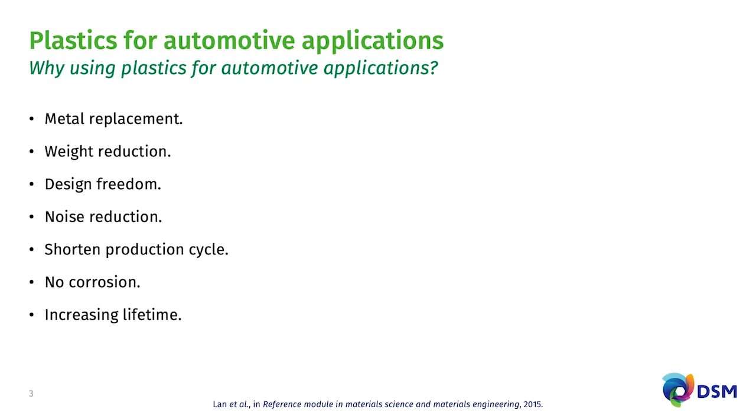Why do we use plastic for automotive applications? There are at least several reasons to do so. The most important one is to use plastic as a metal replacement. This is related to the weight reduction of the car and also lowering greenhouse gas emissions, which are currently, and in the future, being regulated more and more.

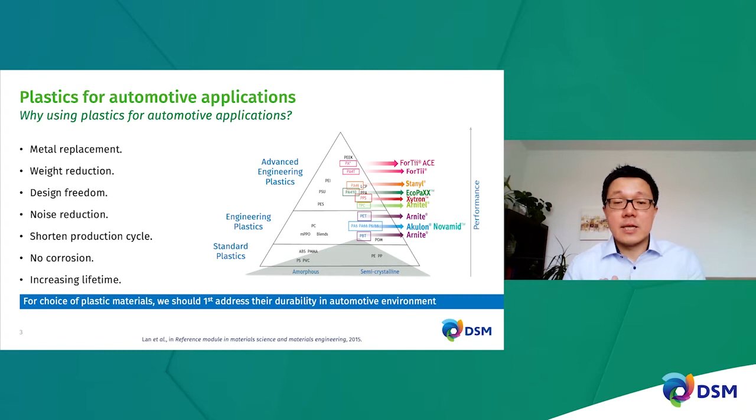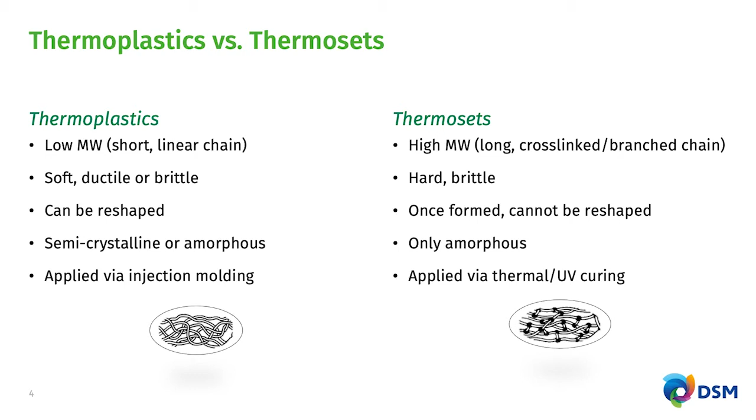In essence, plastic can be found in two forms, either as thermoplastics or thermosets. Thermoplastic polymers typically have a lower molar mass. They're soft or can be found as ductile or brittle materials. This is the type of plastic that is usually applied via injection molding, and you can find it most of the time in under-the-hood applications for automotive.

The second type is thermosets. This is a type of plastic or polymer that has a high molecular weight. It is hard and brittle, usually applied via thermal or UV curing. And this is the type of plastic that you find as paint or coating for automotive in general.

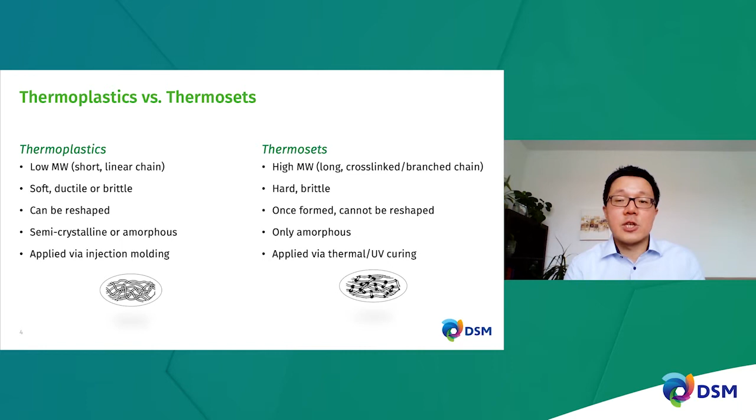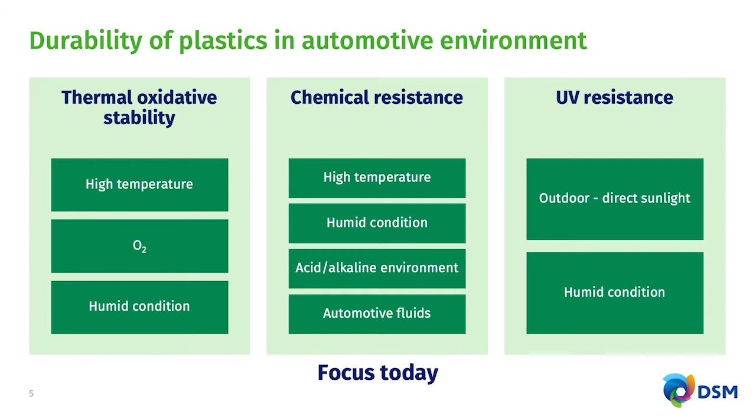If we are talking about durability of plastics in the automotive environment, there are three things that pop up to mind. The first one is related to thermal oxidative stability. The second one is related to chemical resistance. And the third one is related to UV resistance, which is important for plastics used for outdoor applications. Today we focus on the chemical resistance.

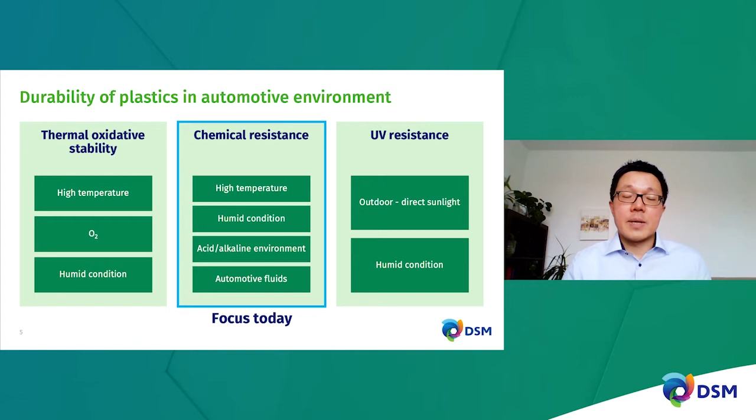Speaking about chemical resistance, usually we are faced with the behavior or resistance of plastics under high temperature, high humidity conditions, high acid or alkaline environments, as well as the presence of additives that are typically used in automotive fluids.

As a definition of chemical resistance of plastics, I borrow the one used by Alfredo Campo in 2008. Here, it is said that chemical resistance is the ability of a polymer material to maintain its original properties after being exposed directly to a chemical environment for a specific period of time.

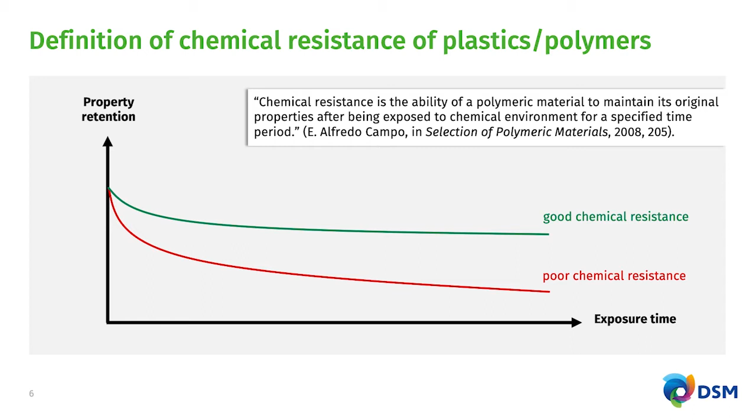Just to give you an illustration of this definition, I made a plot where the y-axis is property retention of plastics versus exposure time. Plastics that have poor chemical resistance are shown in the red curve. Usually, as a function of aging time, the property retention of these plastics decreases dramatically compared to plastics that have good chemical resistance, which is indicated in the green curve.

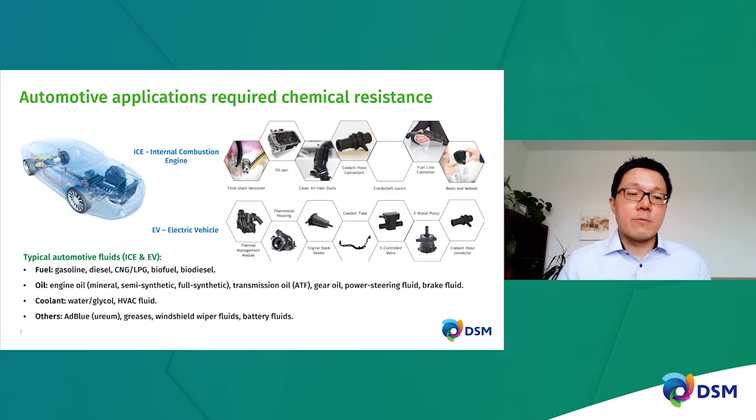And for other types of applications, for example, plastic that is in direct contact with fuel, with oil, and with other types of chemicals such as AdBlue, we can also think about what type of performance criteria such plastics need depending on the chemical environment that they have.

Now, why is it important to have a good understanding of chemical resistance in general? There are at least 3 reasons. The first one is related to the ability for us to choose proper materials for specific applications. The second reason is to be able to better predict performance of plastics under certain operating conditions. This is really intended to narrow down the number of tests. If you know more or less the performance of plastics, then you will be able to design better testing, meaning that the number of tests can be lowered.

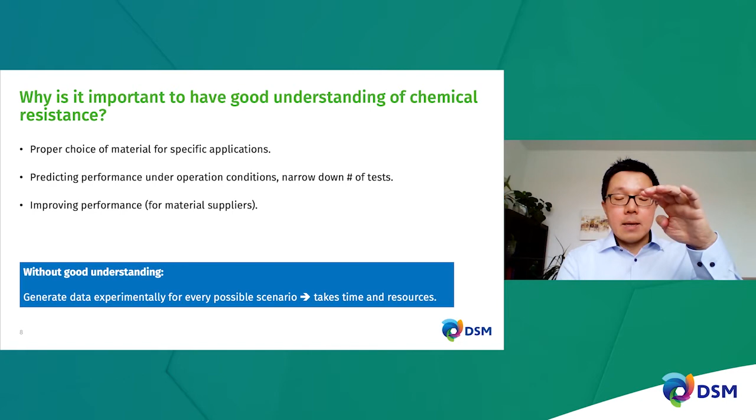For us at DSM as a material supplier, we want to have a better understanding of chemical resistance of plastic in order to improve the performance of the plastic itself for certain applications. Without good understanding, the most straightforward way is typically we generate data with all possible scenarios. Meaning that you typically have a matrix of different types of materials, different types of chemicals used to age the plastics, and a matrix related to different temperatures and different aging times.

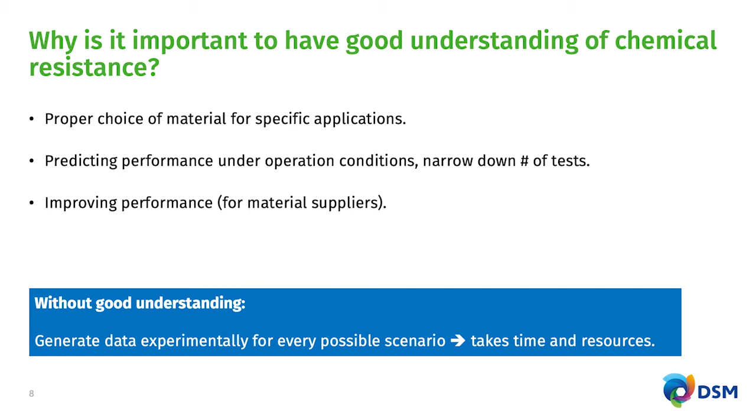So without any understanding, we can do all types of experiments, but typically this takes a lot of time and a lot of resources. So having good understanding is also useful to narrow those down, to have a better selection of the number of tests that we are looking at.

The focus of today's presentation is not on the detail of chemical resistance of a specific polymer for specific applications, because if we go that route, we will only narrow down to certain specific chemicals that might not be relevant to other audiences. So here I consciously chose a more generic theme: the typical challenges in conducting chemical resistance studies, the basic principles of degradation mechanisms during chemical aging, and the important parameters which play a role in chemical resistance.

So hopefully by choosing this more generic feature on chemical resistance or plastic durability study, it can trigger some discussion that we will have in the future. If you have questions about specific chemicals for specific applications, just email me, and then we can discuss this offline.

What are the challenges in chemical resistance study in general? Before we go to that, let me present a little bit on the typical chemical aging and testing that we do at our lab. If we are doing chemical aging, usually we use a standard representative form of plastics in the form of the tensile bar. We place this tensile bar in the sample tray, the sample tray is placed in the glass jar, the glass jar is filled with automotive fluids, and then we put the glass jar into the oil bath, increase the temperature, and start aging.

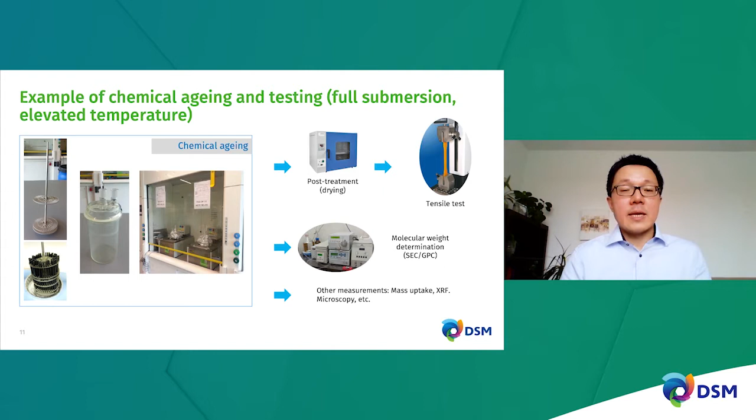After a certain period of aging, we usually take the tensile bar out. We do post-treatment from time to time, depending on the situation, and we do tensile tests afterwards. Additional analysis such as molecular weight analysis is performed depending on the situation. In this case, we use molecular weight analysis using size exclusion chromatography, SEC, also known as gel permeation chromatography, GPC, and other analytical measurements such as mass uptake, X-ray fluorescence, and microscopy.

So in the next few slides, I will give you a little bit more example on some nuance in the aging condition that may play a role in the eventual result of your aging test. So the first example that I want to highlight is the importance of ambient environment. When you do aging in nitrogen versus air, sometimes the result can be so dramatically different, as is shown here. This figure on the left shows the tensile strength retention of polyamide aged in ATF at 150 degrees Celsius under nitrogen environment or air environment.

As you can see, in nitrogen environment, there is no tensile strength retention reduction whatsoever, whereas when you change the nitrogen environment to air, within 200 hours you already reach half lifetime of the materials. The same story for polyamide in Dexron 6 ATF at 150 degrees Celsius in the right-hand side figure. In this case, the molecular weight retention is plotted as a function of aging time. In nitrogen, you don't see any decrease in molar mass, whereas in air environment, you see that dramatic decrease, especially in the first few 100 hours. So this is really highlighting the importance of ambient atmosphere during aging.

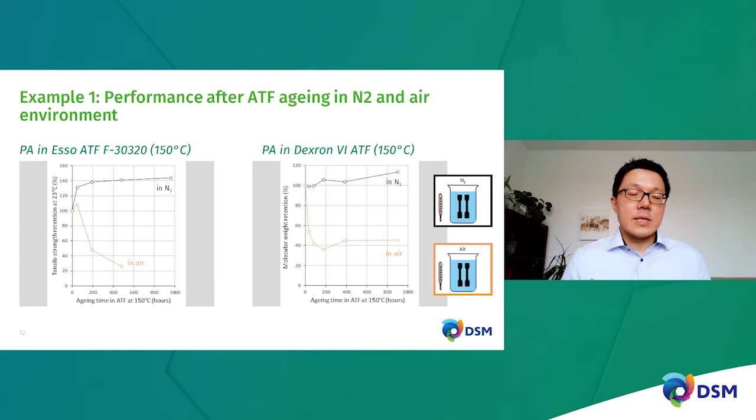The second example is something that is not that trivial. This is related to the relative amount of polymer that you use during aging. The left-hand side figure shows the tensile strength retention as a function of aging time of polymer in ATF at 150 degrees Celsius. In this case, I show two different cases where the black indicates 20% of polyamide, meaning that when you start this aging, you start with 20% polyamide and 80% ATF, versus the situation where you only use 10% of polyamide in the jar. And you can see that when you use a lot of polyamide during aging, the tensile strength retention is reduced less dramatically than when you use less polyamide, in this case 10%.

The same situation happens also, for example, if you are looking at aging of thermoplastic elastomer, TPE, as a function of aging time in ATF. Here we plot the strain at break retention at room temperature. Again, the same story. If you compare the result between 10% TPE in oil versus 15% TPE in oil, the retention of 15% TPE is shifted slightly to the right-hand side in terms of aging time. So the TPE has longer lifetime.

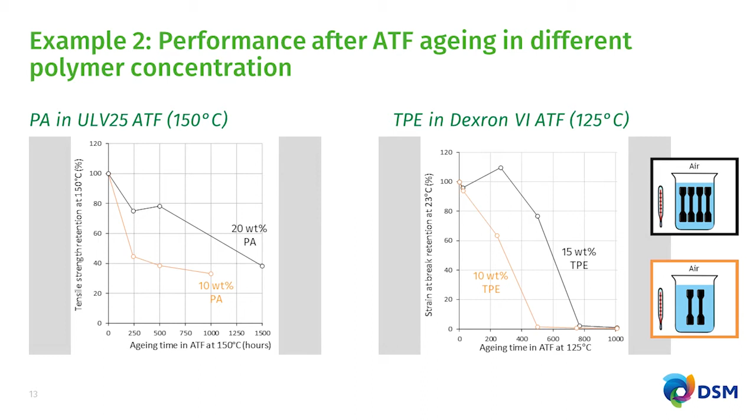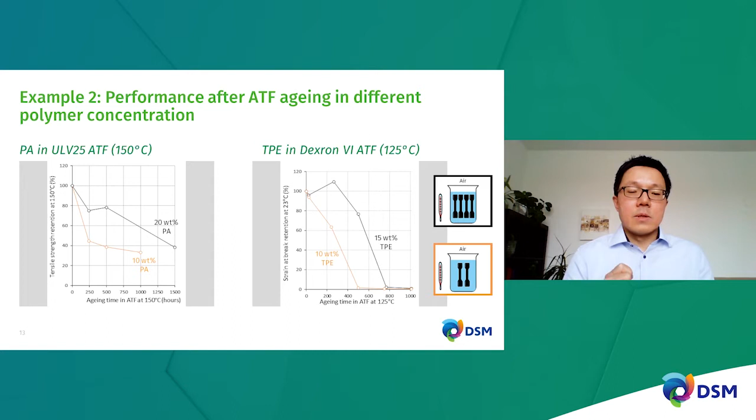Now, one way to understand this is relatively simple. You can imagine that when you start to age polymer in environments like ATF, as a function of time, more and more active species are generated in ATF that start to attack the polymer. If you have more polymer in the jar, statistically speaking, fewer active species will be absorbed into the polymer on average per sample. So the polymer starts to be degraded much later when you have much more polymer in the aging jar compared to when you don't have a lot of polymer. So the second example highlights the level of nuance and level of detail that you need to take care of when performing this type of aging.

Now, I have mentioned 2 examples, but there are a lot of different factors that can play a role in the eventual performance of materials in a chemical resistance study. So I give 3 categories here. The first belongs to the material composition dimension. As you can imagine, different polymers will have different resistance. Sample shape and sample size also play roles. Thinner tensile bars, for example, will be degraded much faster than thicker tensile bars. So design criteria for thickness are also very important, because we need to make sure that we age more representative samples during this type of study.

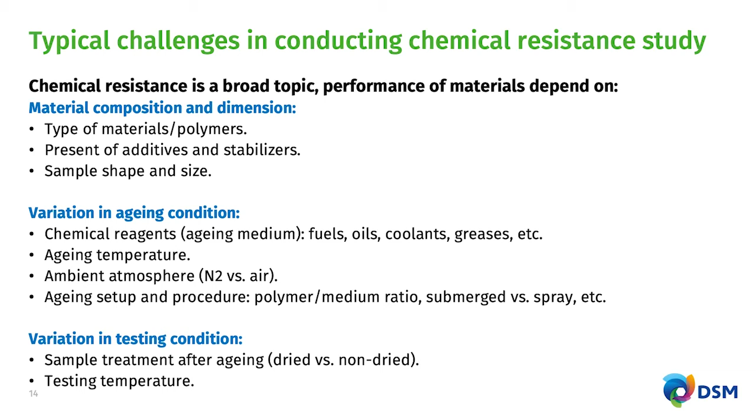The second category belongs to the aging conditions. I already talked about nitrogen versus air. But there are also differences in aging temperature, so that's something you need to be aware of. I already talked about polymer to medium ratio before, an effect that is not trivial but important. And the most important thing is also the different type of chemical agents. If you are using different types of oil, some oils are more aggressive than others.

The third is related to the testing conditions. So beware: if you test samples after aging, the performance of a dried sample versus a non-dried sample can be quite different. And also beware of comparing results from different testing temperatures. So in essence, fair comparisons between chemical resistance data from 2 different sources: if you have data from 2 different sources and try to compare them, be very careful, because if you do not know exactly the aging conditions used to generate such data, typically this data cannot be compared directly. So I always advise anybody who does this to be very careful, and make sure that you have almost identical procedures so you can actually compare 2 results directly.

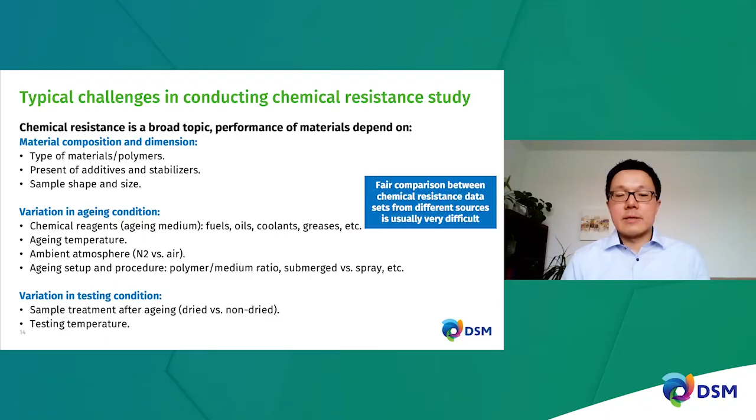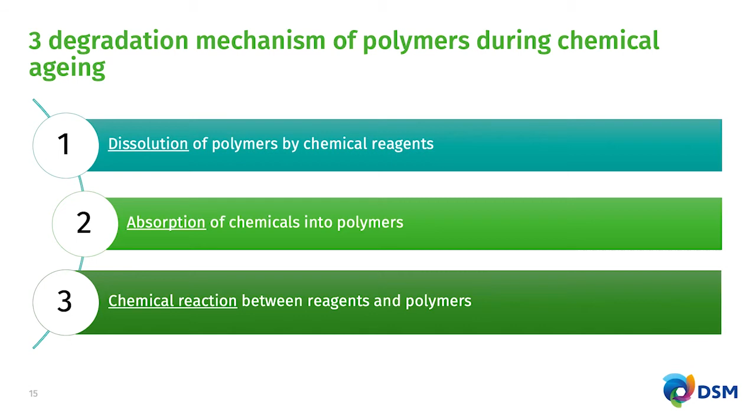Now we have been discussing degradations, but I want to highlight in the next few slides different degradation mechanisms of polymer during chemical aging. So if we're talking about degradation mechanisms, there are three things that can happen. The first is related to the fact that the chemical reagents used to age the polymer will start to dissolve the polymer. The second one is related to absorption of the chemicals into the polymer. And the third one is related to chemical reaction. So the polymers start to react with the reagents, and usually it leads to the degradation of the polymer itself and reduction in the properties.

So for the first degradation mechanism, dissolution of polymers, perhaps I can illustrate it with an object related to our daily life. If you use a laundry or dishwasher detergent pod that is made of polyvinyl alcohol, this polymer will be dissolved in water by design after several seconds. So this is the type of degradation I'm talking about, dissolution of polymers in the solvent.

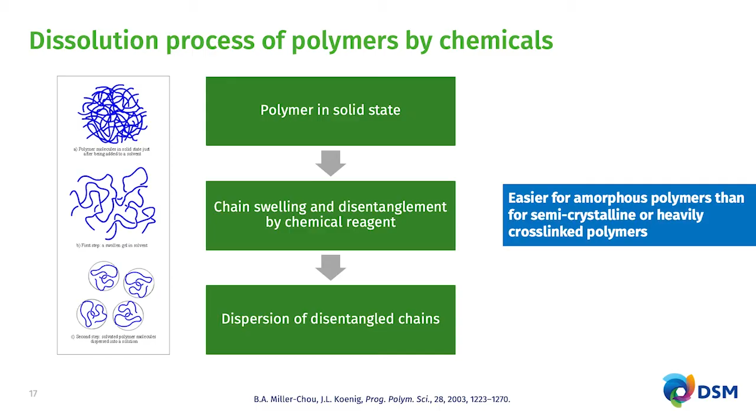So there are certain processes for dissolution, just for your information, and I'm pretty sure most of you know about this. When you start placing a plastic or polymer in certain chemical reagents, the polymer starts in the solid state, and reagents or chemicals start to be absorbed. And if this reagent is really good at dissolving the polymer, the molecules within the solid polymer start to swell because there is some absorption of chemical in there. And after that, you have disentanglement. And if this happens more and more, what you eventually have is the dispersion of the disentangled chains, meaning that your polymer is no longer in the solid state, but is dissolved by the reagents.

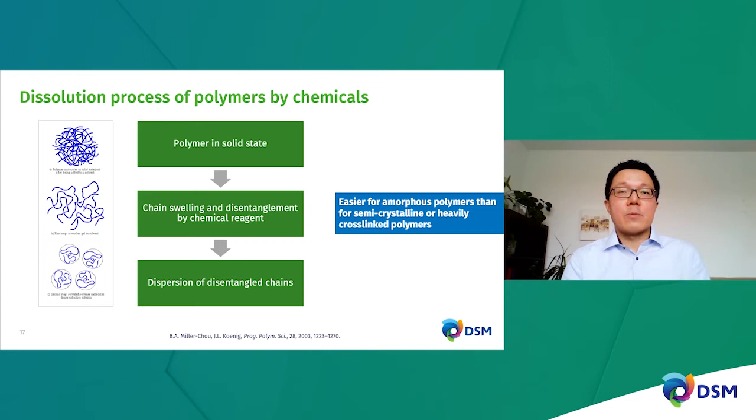This process happens more easily for amorphous polymers than semicrystalline or heavily cross-linked polymers that we typically find in thermosets. In principle, there are several ways to predict whether a certain solvent or chemical can dissolve a certain polymer. One of the most popular is to calculate the so-called solubility parameter, which by definition represents the cohesive energy density of a material. This cohesive energy density is usually expressed in terms of van der Waals forces, so dispersion force, dipole-dipole force, as well as hydrogen bonds.

To make it a bit more tangible, when you calculate the delta parameters of polymer versus solvent, if the delta parameters of these two are alike or very similar, then it is most likely that the solvent will be able to dissolve the polymer. If the solubility parameters of the polymer and solvent are not the same, then they are likely not to be dissolved.

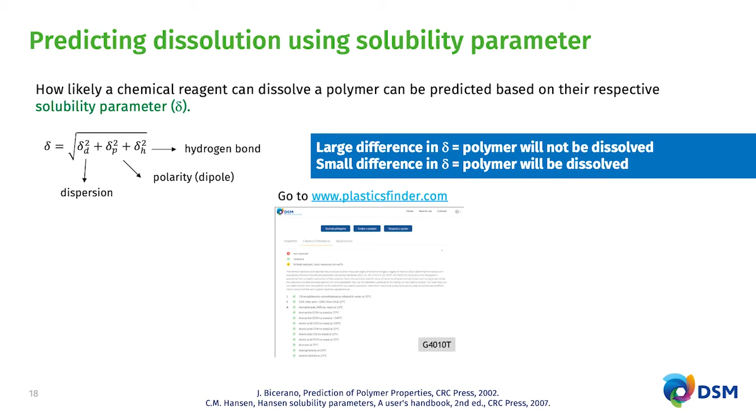So PPS in this case is really chemical resistant. Usually when you see that list, most of the time there are not so many solvents that can be used for dissolving PPS, and the solvents that cannot dissolve the polymer are usually indicated with a green check on our plasticsfinder.com website.

So the second degradation mechanism is related to the physical absorption of chemicals. Just to illustrate this point again with something you can find at home: those of you who use soft contact lenses must be very familiar with this. A silicone hydrogel contact lens is made of polymeric materials. If you compare their form and feel when they are wet versus dry, you can see the difference. Wet soft contact lenses are usually rather round and rather soft, but as soon as you dry the contact lens out, it will become brittle and wrinkled.

So this is a kind of physical phenomenon, differences due to absorption of water, in this case of a soft lens, that can play roles in the appearance and also the properties of the materials. So if we talk about absorption of chemicals, we are talking about three different parameters that play roles in this.

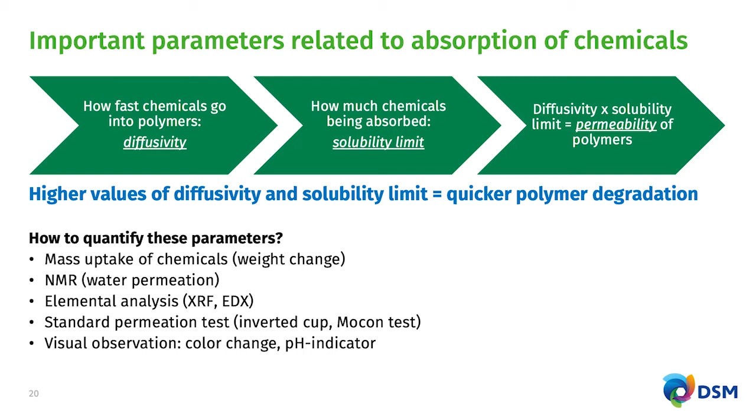So permeability is a very important parameter because this is something that can be easily measured using standard permeation tests. The diffusion and solubility can also be easily measured, for example, using mass uptake or weight change type of measurements. We can also use nuclear magnetic resonance, NMR, to study water permeation, and other types of techniques listed here.

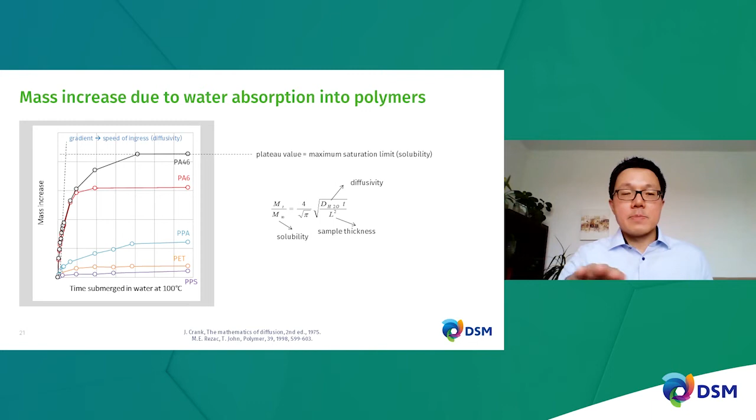So if you look into the curve belonging to PA 4,6, for example, the mass increase starts to go up, and at a certain point it reaches a plateau value, and this plateau value is really indicating the maximum saturation limit and maximum solubility limit of water that can be absorbed into PA 4,6.

The diffusion coefficient value you can actually measure by looking at the gradient of the initial data. The gradient there is really related to the speed of diffusion of water inside such a polymer. And usually we calculate this diffusion coefficient by applying a certain model. The right-hand side figure shows the first order Fickian type of approach that we usually apply to get the diffusivity value of such a curve. But you can also use other types of models for this case.

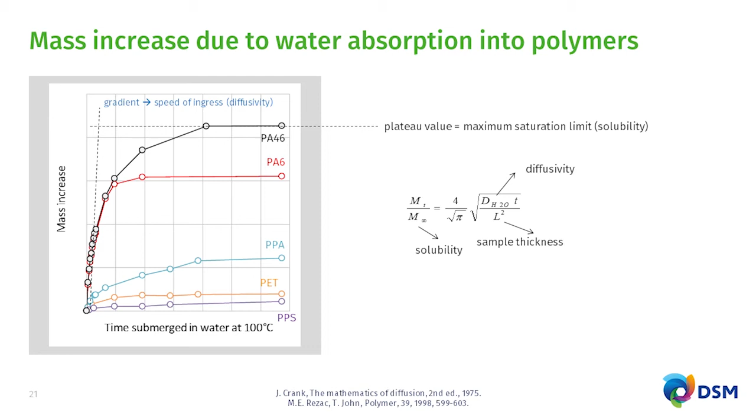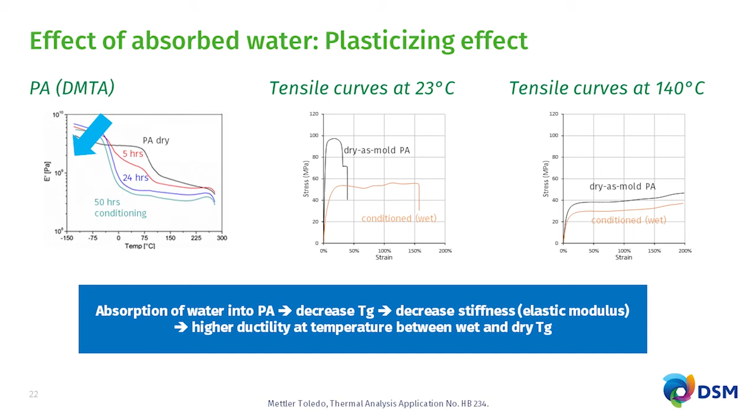Now, what is the consequence of having this low Tg? In principle, when you do the tensile test at room temperature on dry polyamide, as indicated in the middle figure in the black curve, you measure the property of the polymer below its Tg. But as soon as the polyamide absorbs water and the Tg goes below room temperature, what you measure is the property of polyamide above its Tg. So usually what you find is lower tensile strength and much more ductile material, as you see in the orange curve.

So to summarize, absorption of water into polyamide will typically result in a Tg decrease and decrease of stiffness, as well as an increase in ductility, because you start to have more and more water in the polymer. And this phenomenon also happens for apolar solvents like oil and other types of media that usually exist in the automotive environment. So something that you need to be aware of.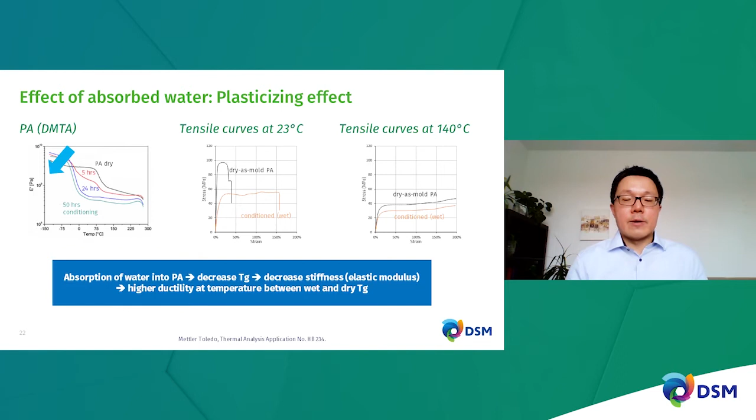So the third degradation mechanism, which is the most important, and I think most of you know about this, is chemical degradation. As an example, I show here a plastic hose that is used to channel hot engine oil, and after a certain period of time, you see some cracks on the surface of the plastic hose, as well as embrittlement at the surface. When you do proper analysis at the surface, you will see that the surface is composed of lower molar mass plastic compared to the original plastic before aging.

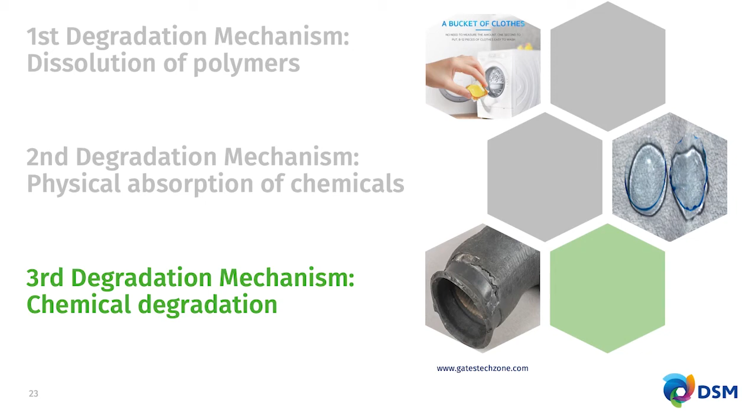When we are talking about polymer degradation, the most well-known degradation mechanism is hydrolysis. So in this case, here I show two different reactions. The first one belongs to the reaction between polyamide and water. So what happens is that when water starts to react with amide bonds, the amide bonds will start to be cut, to be cleaved, to form carboxylic acid end groups as well as amine end groups.

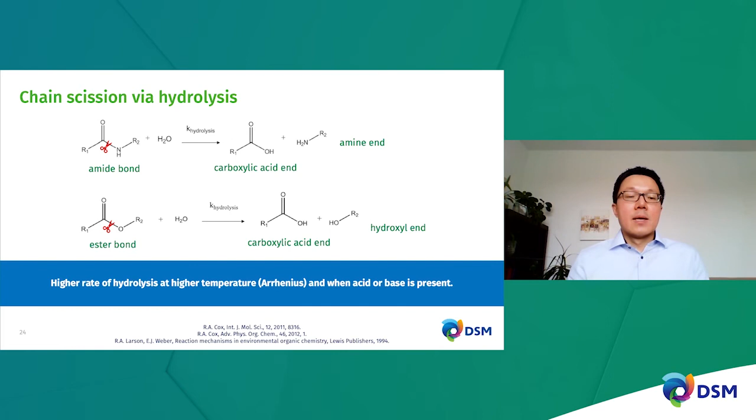The second example shows the same thing. So the ester bond from polyester reacts with water, and water starts to cleave the ester bonds such that we will start to have more and more carboxylic acid end groups and hydroxyl end groups being created as a result of hydrolysis.

So the higher rate of hydrolysis typically happens at higher temperature, following Arrhenius behavior, and when acid or base is present. So it can be acid-catalyzed or base-catalyzed hydrolysis for amide and ester bonds. So this is something that I think is very popular, and a lot of people know about this.

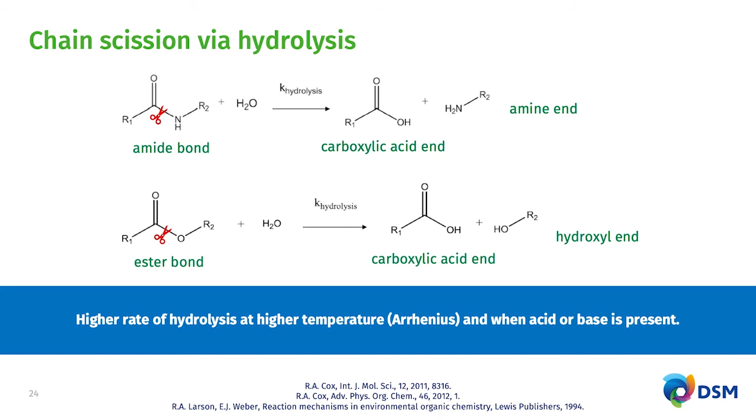So in the past, we also studied the mechanisms of hydrolysis of amide and ester bonds using quantum mechanics calculations. So what we do here is to theoretically predict the amount of energy needed during the whole hydrolysis process via several transition steps. And it turns out that the rate-determining step, the most energetic transition step, belongs to the nucleophilic attack of the carbonyl part of the amide bonds.

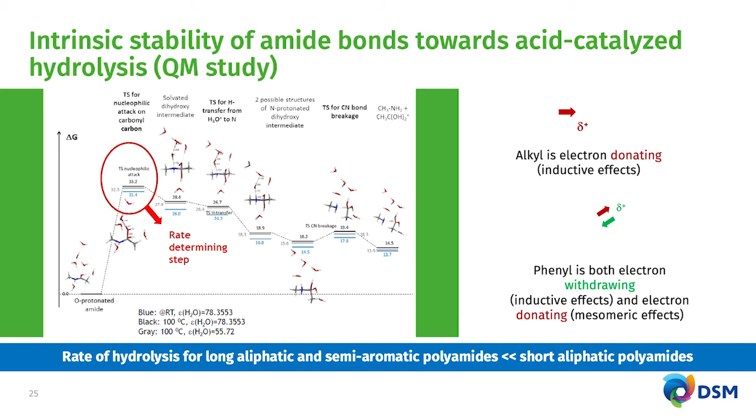And we use the energy needed to perform this transition step reaction as a parameter to calculate theoretical reaction rates. So we did a lot of different calculations for different types of chemical structures of polymers.

And just to highlight here, if you consider aliphatic polyamide in the top right-hand side figure versus semi-aromatic polyamide, it turns out that for semi-aromatic polyamide, the energy needed for the transition step is much higher. And we can link that to the fact that the carbon of the carbonyl part is less electropositive compared to the carbon of the carbonyl part of the aliphatic polyamide.

So this type of theoretical calculation is really handy, especially if you want to design a new polymer, a specific polymer for specific applications, down to the level of molecular structure.

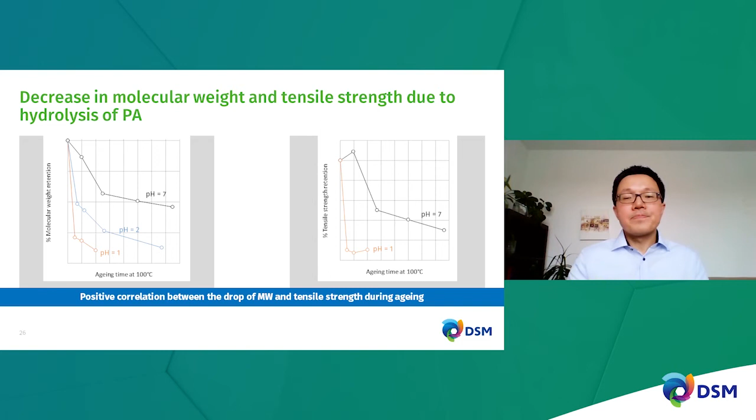Now, the next few slides highlight the impact of hydrolysis on polyamide properties. So the left-hand side figure shows the molecular weight retention of polyamide after aging at 100 degrees Celsius at different pH levels: pH 7, pH 2, pH 1. pH 1, you can think about as conditions very familiar during exhaust gas recirculation tests. So the EGR test typically is pretty acidic.

And if you put in some polyamide that is not resistant towards acid-catalyzed hydrolysis, you will have pretty fast degradation there. So this is just indicating that acid plays a role in degradation. So the lower the pH, the more the acid, the faster the molecular weight of the polyamide goes down. In this case, it is polyamide 4,6.

And this reduction in molecular weight also has a direct link to the tensile strength retention, as you can see in the right-hand side figure. So in essence, if you have a more chemically resistant polymer, then the molecular weight is more or less intact, and as a result, the tensile strength is also more or less intact.

For a polymer material with a certain thickness, chemical degradation does not happen instantaneously throughout the whole thickness of the material. So we also need to take into account the speed of diffusion of the aggressive species from skin to the core. So just to highlight this important topic, here I show you some tips and tricks that we do with our polyamide.

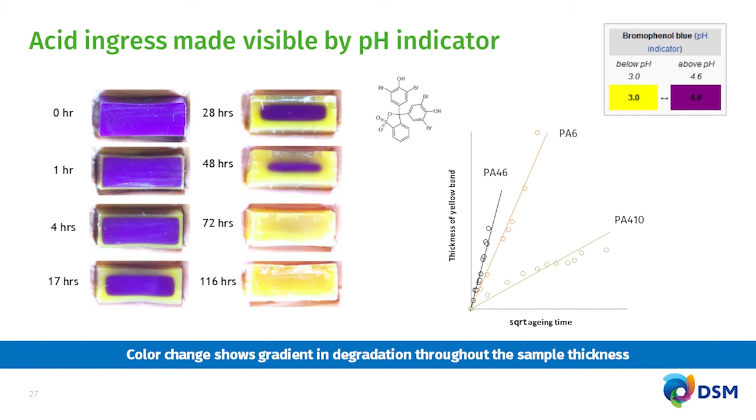Something that we also observe is that wherever there is a yellow layer, there is also typically a low molar mass of the polymer, cracks start to form, and pretty brittle material when there is a yellow band. So we do this for different types of polymer, and you can see that for a polymer like polyamide 4,6, the ingress of acid is much faster than for a less polar polyamide like polyamide 410.

So this is also indicating that by changing the molecular structure, by changing the polarity of the polymer, you can in the long run limit their degradation via limiting the ingress of the active species itself.

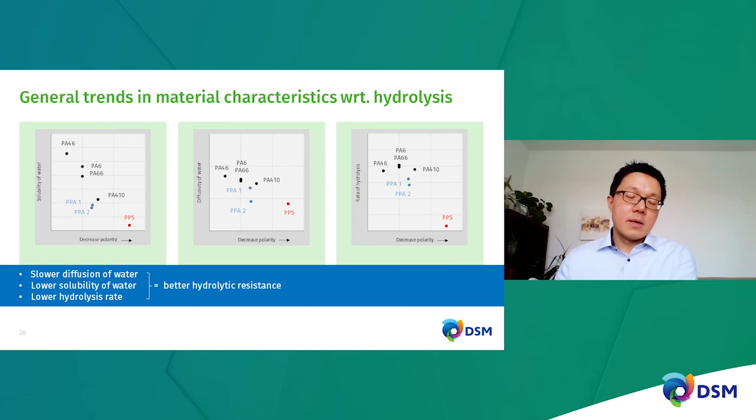So this is one example for aging in a polar medium like water or acidic solutions. But you can also do the same thing for different solvents or chemical reagent environments, such as engine oil, ATF, water glycol solution, and so on. So this is just to show you a bit more of what type of parameters are important and play roles in such environments in terms of chemical resistance stability.

Now we have been discussing degradation of unfilled polymer, but what about glass-filled polymer? I haven't mentioned that before, but this is highlighting some of the principles that are important. If you are talking about glass fiber reinforced polymer, not only do you have polymer, but you also have glass fiber and the glass fiber polymer interface. Usually in automotive fluids, glass fiber is pretty inert. So you are left with two entities that can be degraded: the polymer or the glass fiber polymer interface.

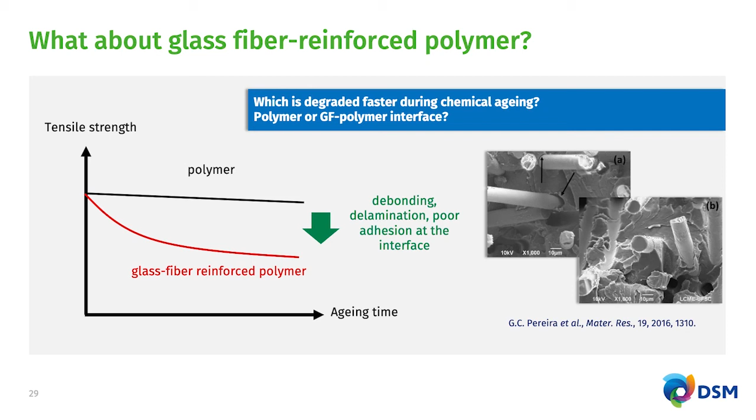Now, imagine you are using PPS, a super high chemical resistant grade. Usually what happens is that you don't degrade the polymer, but you degrade the polymer glass fiber interface. So if you overlap the tensile strength retention of such a polymer versus its glass fiber reinforced version, unfilled PPS versus glass-filled PPS, usually for unfilled PPS you don't have a lot of reduction in tensile strength, but as soon as you introduce glass fiber where the interface is not optimized, you see that reduction. And this reduction is manifested by debonding, delamination, degradation of the interface.

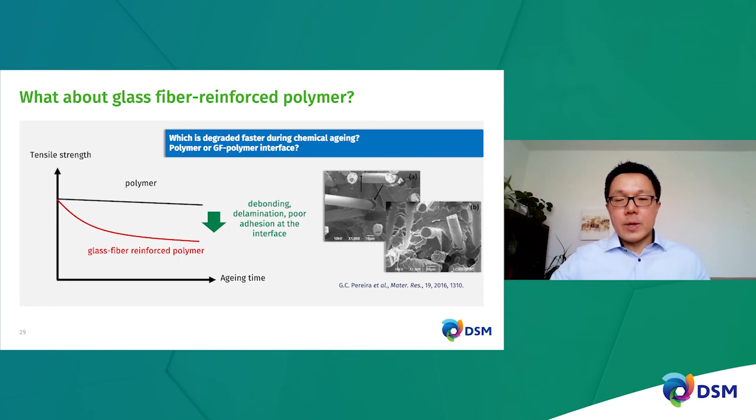And this is already reported widely in the literature: if you look into the glass fiber interface with the matrix after aging, what typically happens is that there is some debonding between the glass fiber and matrix, such that the interface no longer carries load when we do follow-up tensile testing. So this is something that we need to pay attention to.

So we at DSM, we make a lot of improvements for our glass fiber reinforced PPS. In this case, the left-hand side figure shows you the tensile strength retention of reference glass-filled PPS versus improved glass-filled PPS as a function of aging time in water glycol at 135 C. So we make improvement at the interface such that the retention is now going from the red curve into the green curve, so pretty stable.

And if you look into the AFM figure or SEM figure, what you see in the right-hand side figure there is that for the reference GF PPS, as I said before, after a certain period of aging time, you see a debonding, whereas for the improved glass-filled PPS, you don't see any debonding, and it is translated to the increased tensile strength retention.

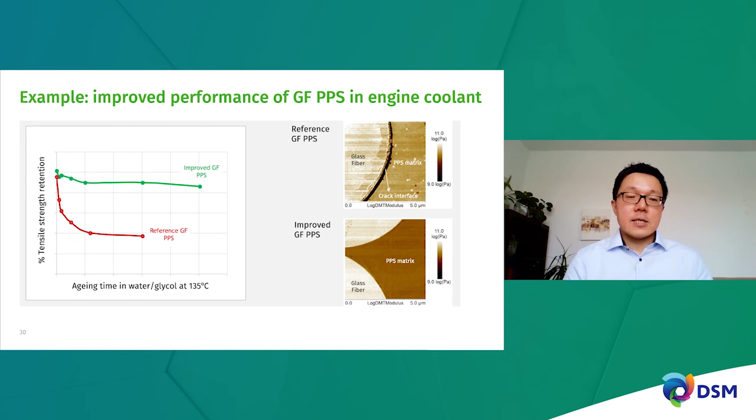To recap, just to summarize what we have been discussing so far regarding the degradation mechanisms. So typically there is a direct link between mechanical and chemical structure of polymers after aging. So when we are talking about aging of polymer in chemicals, what we start to see is usually a reduction in certain mechanical performance after aging, which is due to the decreasing of molecular weight. And if you have glass fiber in the compound, also decrease of the interface between the glass fiber and the polymer.

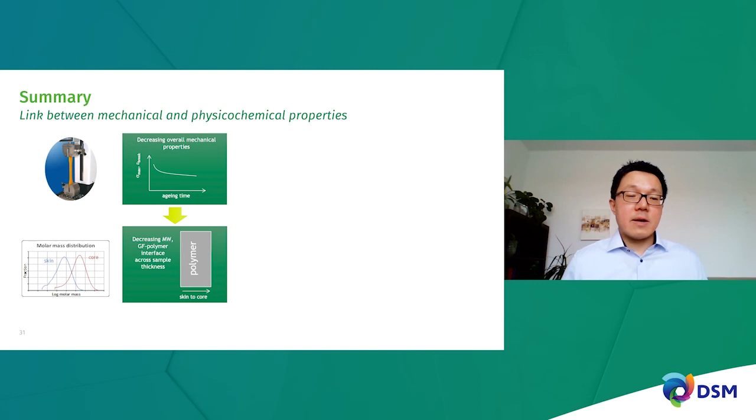And this is due to the absorption of the chemicals as well as the reaction of the chemicals to the polymer, or reaction between the chemicals towards the interfacial region of the glass fiber matrix interface, which is related to these three important parameters that I've been discussing: diffusivity, solubility, and the reaction rates. So if all these parameters are low, then you don't need to worry about the degradations. But if they are pretty high, then you will see the impact in terms of mechanical performance.

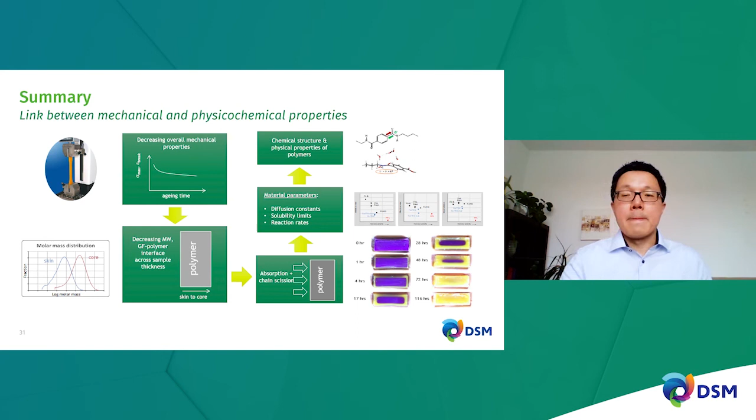And these three parameters are linked to the chemical structure and physical properties of the polymer itself. So the intrinsic properties of polymers usually link towards these parameters and eventually to the mechanical properties. So at DSM, we are actually designing from the chemical structure, from the additives that we can make use of, to improve the mechanical properties after aging via all this route. So we have this integrated approach, designing from the structure towards the properties of the polymer at the end.

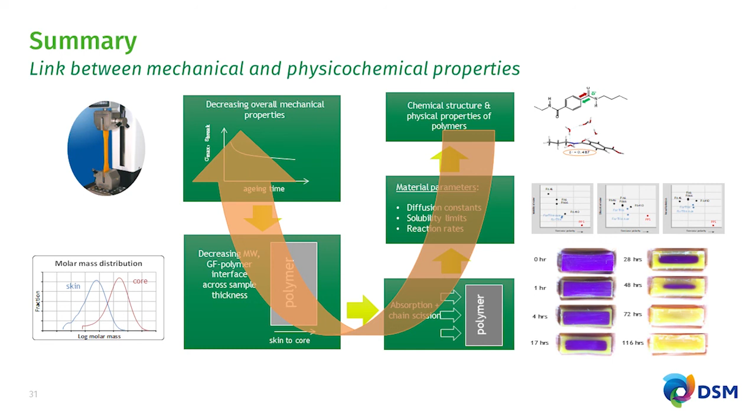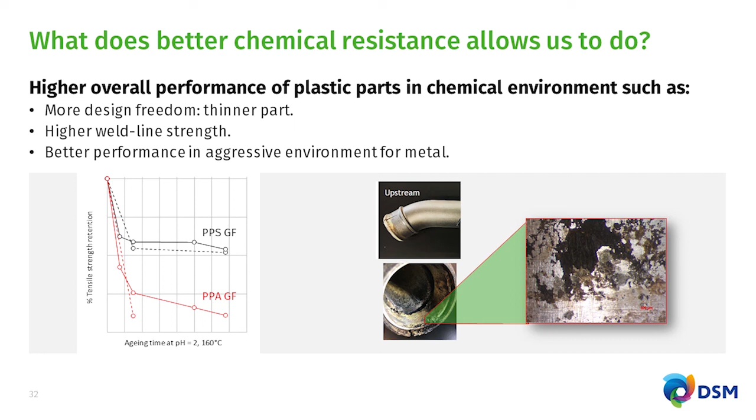And the third one, which is important, is related to why we use plastic in the first place for automotive, i.e. as a metal replacement. Time and again, when we do this chemical aging, the chemicals themselves are really aggressive towards metal. By aggressive, I mean they lead to corrosion of metal. So just for example, the right-hand side figure here is a type of test that we have been performing where we have polymer tubes with a stainless steel compression ring, and after a certain period of chemical aging, we actually see a lot of corrosion on the stainless steel metal surface, but not so much degradation of the plastic.

So it's kind of a reminder that we use plastics to replace metal, but it also brings added value because we are no longer faced with a corrosion issue.